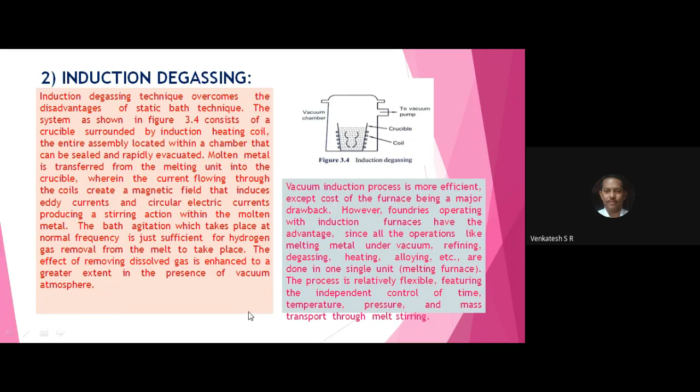Please write down the induction coil along with the crucible or ladle. Next, write down number 3, stream droplet degassing.

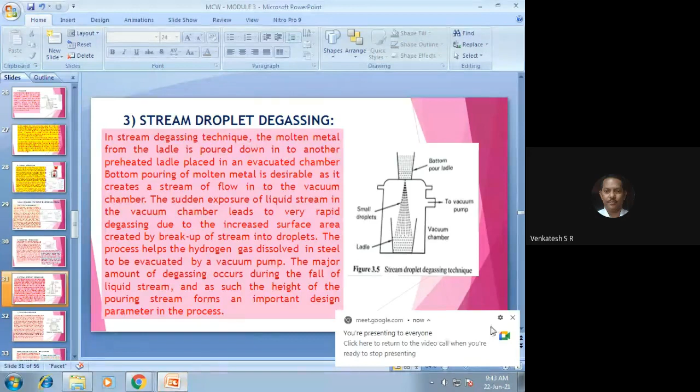Please write down number 3, stream droplet degassing. Underline and write down the rough diagram of stream droplet degassing.

Say this is the vacuum chamber and this is the end, or the line which is connected to the vacuum pump, and this is the bottom pour ladle. Bottom pour ladle means there will be a provision in the bottom of the ladle through a mechanism. From the outside they open the bottom door of the ladle, which releases the liquid metal, causing the fall of liquid metal inside the ladle, which is placed inside the vacuum chamber.

And as the metal falls inside the ladle, inside the vacuum chamber, the stream coming from the bottom pour ladle, which is in tiny particles, small particles or small droplets, is dropped from the top of the vacuum chamber, so that due to the vacuum in the chamber, the stream droplets or tiny droplets carry the gas released, which is released to the vacuum.

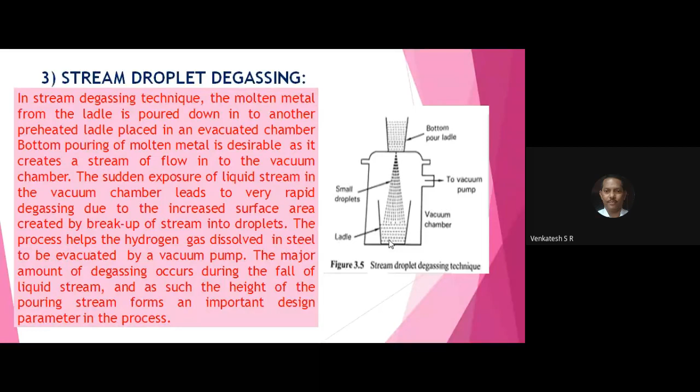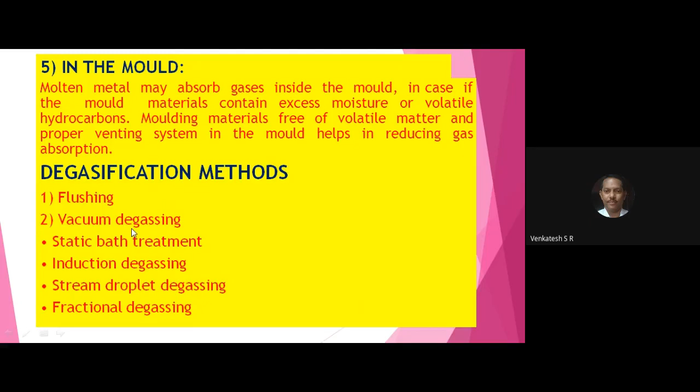Once again, I repeat the question. First, what is degasification? Explain briefly with neat sketches degasification methods. For this question, first write that degasification means removing the gases present in the liquid metal in the foundry, and degasification methods are classified into two major types: first flushing, second vacuum degassing. For flushing, you have the diagram. Draw this diagram for flushing of gases in the liquid metal.

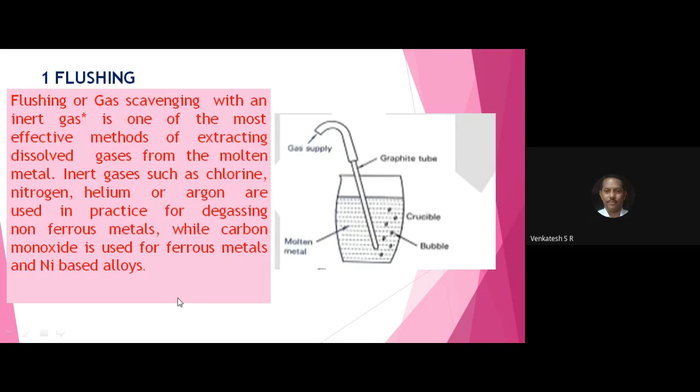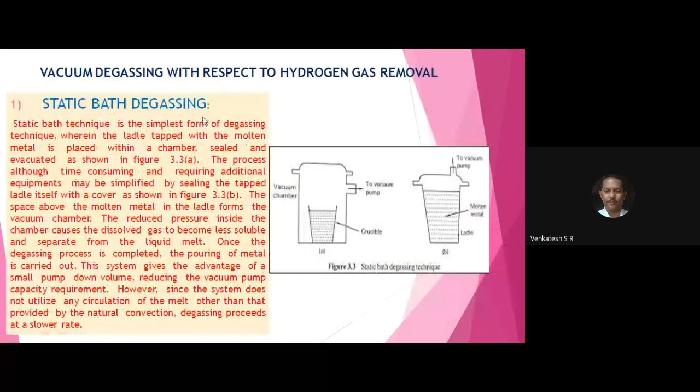First method. Second method, vacuum degassing. Here you have 4 types of vacuum degassing: this one, static bath degassing, induction degassing, stream droplet degassing, fractional degassing. So first one, flushing; second one, vacuum degassing with 4 types. You write all 5: one for flushing, the other 4 for vacuum degassing. If you write all 5, you will get 10 out of 10.

Very, very important. Almost every question paper has this as the 5th or 6th question in the 3rd module.

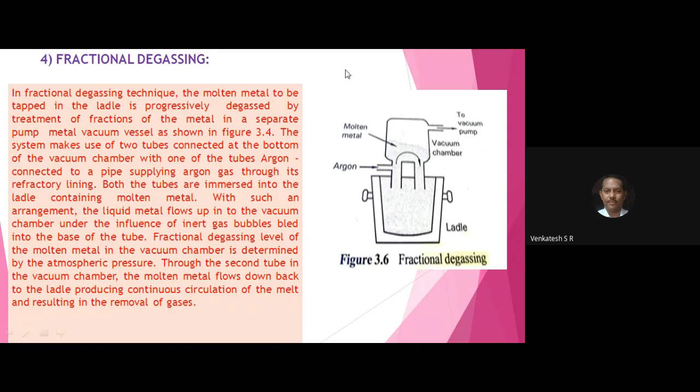Next, write down fettling and cleaning of castings. Fettling and cleaning of castings, underline that. Below that, write down A, removal of sand and other impurities.

After removing the casting from the mold box, some sand particles stick to the surface of the casting; they are removed by using a wire brush, a shot blasting machine or a sand blasting machine. There is a container or chamber that looks like a boiler, with a circular table that rotates inside the chamber. All the castings are placed on the rotating table of the shot blasting or sand blasting machine.

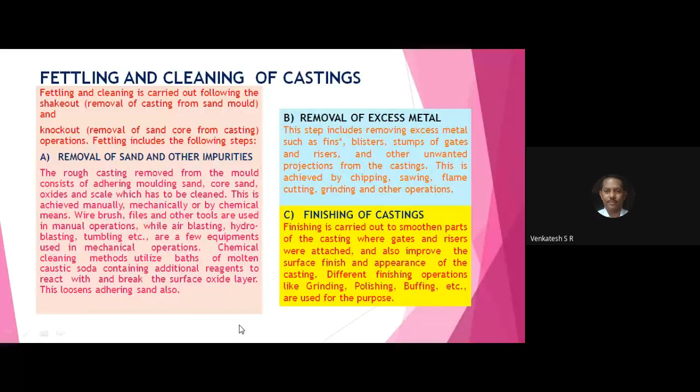Casting defects. Underline that. Write down a small sentence: the casting process involves a number of variables

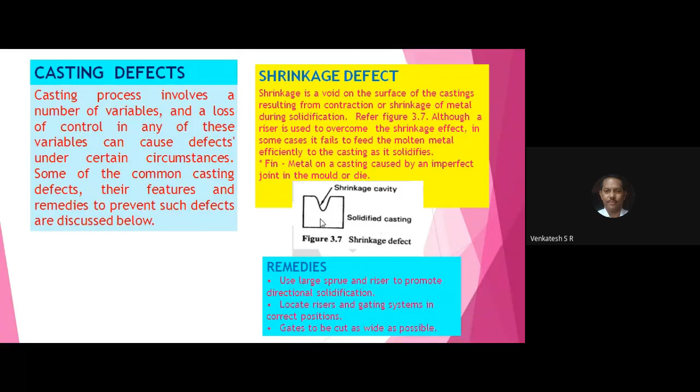Shrinkage means shortage of liquid metal in the mold, so that there will be a hole, void or cavity in the metal. This type of defect can be removed by using a riser, a blind riser, a special type of riser, in order to avoid the formation of shrinkage defect in the casting. That's one method. The other method is to use excess metal. Don't allow the shrinkage of liquid metal, so that you can prevent the formation of shrinkage defect.

This type of defect arises due to gas or air entrapped in the liquid metal, which makes the blowhole and pinhole on the surface of the casting. This type of defect can be prevented by using a degassing method, maybe vacuum degassing or flushing of the liquid metal with the inert gas argon. You can remove the blowholes and pinholes on the surface of the casting. Those are the remedies for removing blowholes and pinholes on the surface.

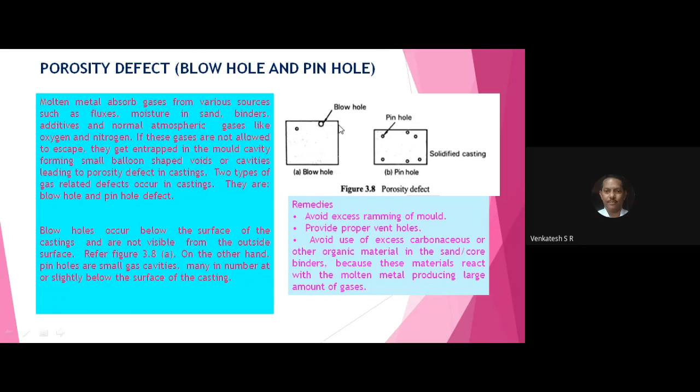And also you have to provide the vent holes properly in the mold, and avoid excess ramming of the mold also. You can remove defects like blowholes and pinholes on the surface.

Next, come to the point misrun. Suppose you have a 1 ton casting or 500 kg casting. You pour the liquid metal at different locations on the mold cavity. Misrun, the name itself indicates running of the liquid metal in different directions. There will be a misrun, not filling the end of the casting. Misrun, that is an unfilled cavity.

In between the casting and the end of the mold cavity, the liquid metal stops and solidifies. That's called an unfilled cavity. That's called misrun. All of you write down misrun. The remaining defects we will discuss tomorrow. Now I stop at this stage.